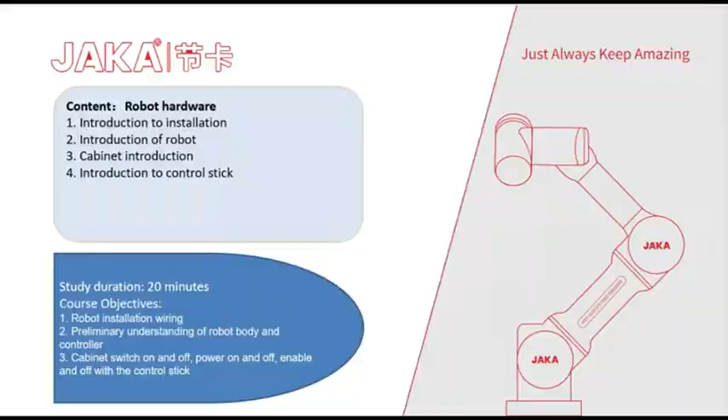Part 1: Introduction of installation. Let's take a look at the robot unpacking and installation video.

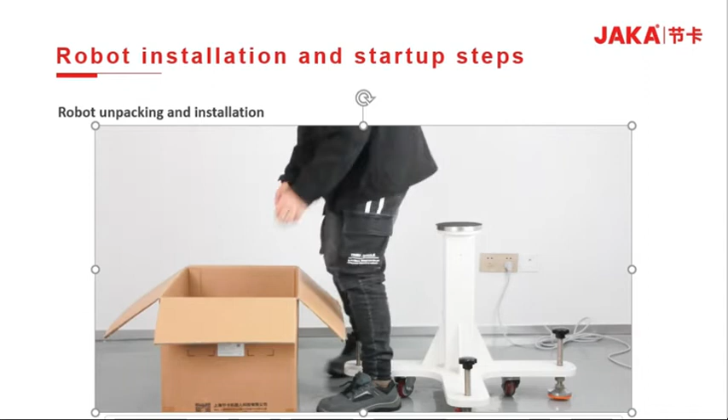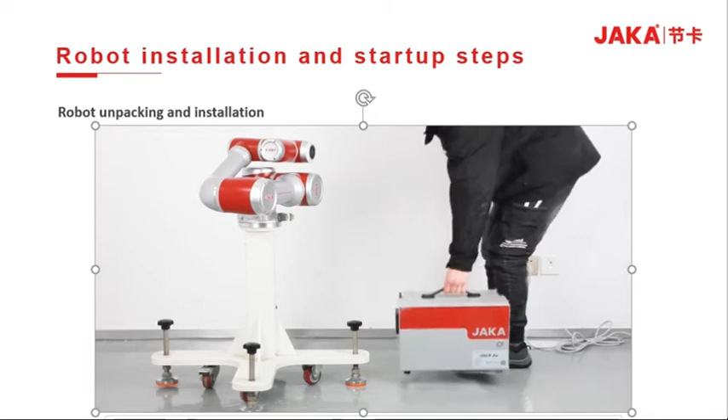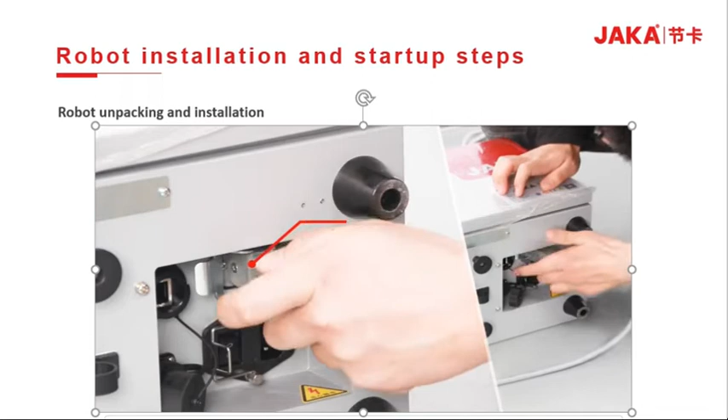First, take out the robot from the packing box and install it on a fixed base. Fix the control cabinet and connect the heavy cable of the robot with the hexagon screw in advance. Connect the robot control stick wire, then connect the external router.

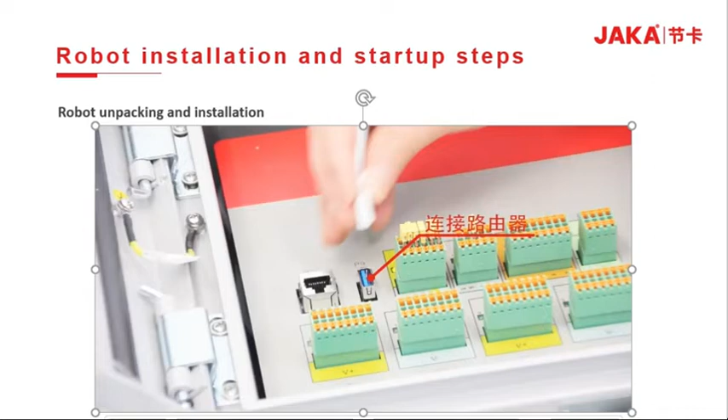Take down and route the network cable through the cable hole and connect it to the bottom network port.

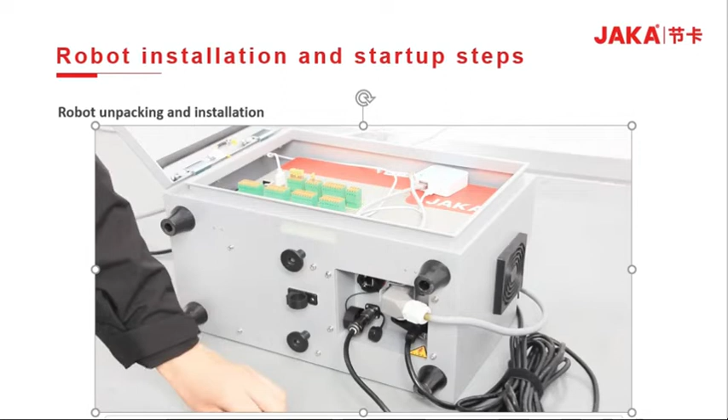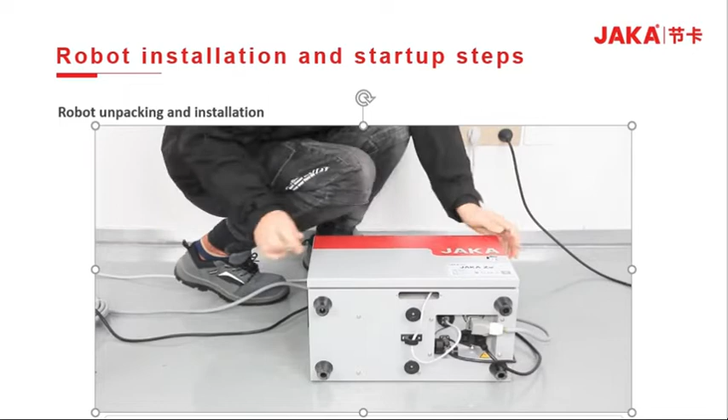Then you can connect the power supply, release the emergency stop button, and connect the pad to the wireless network.

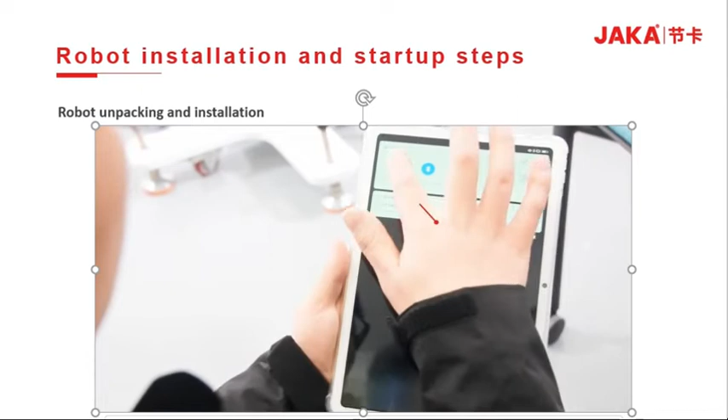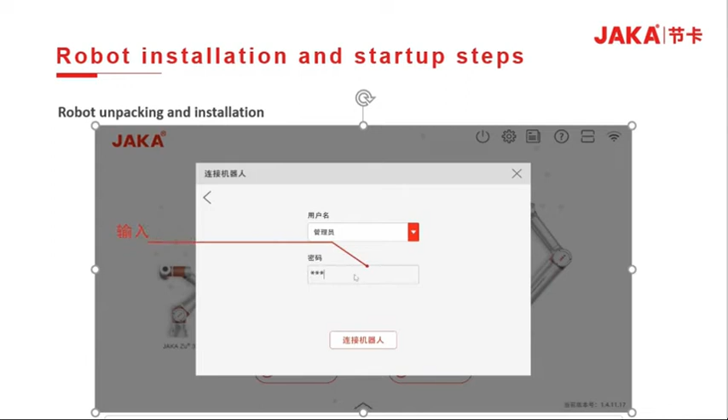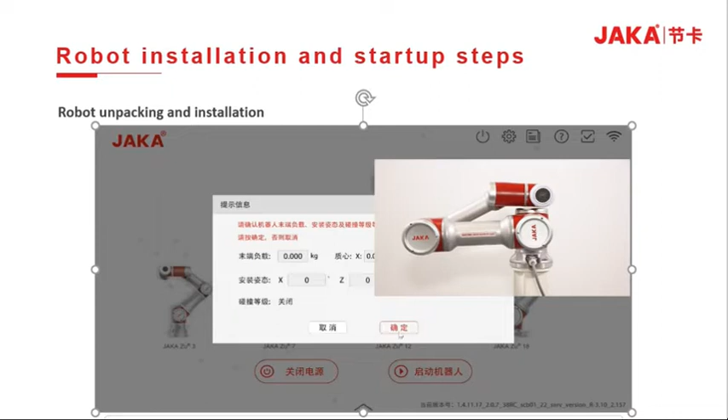Then open the software, click the connect button, select the robot, input the administrator password, JAKA admin. Then you can turn on the power and start the robot. The installation is complete.

The robot is fixed with 4 M6x25 inner hexagon screws. The 7, 12, and 18 models are fixed with 4 M8x25 inner hexagon screws. The Minicobo is secured with 4 M6x16 hexagon screws.

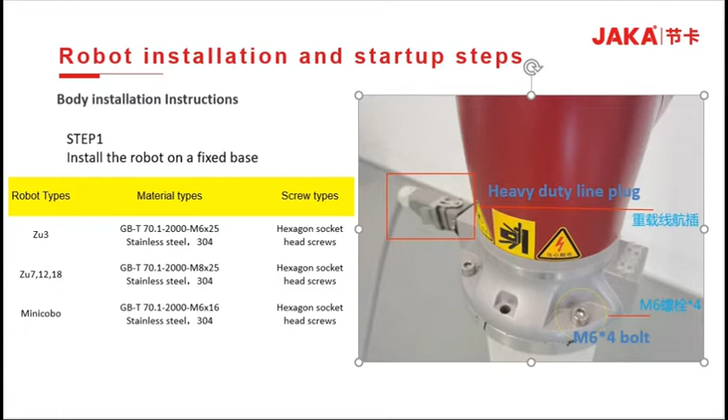On the right, we can see the bottom of the control cabinet. It is successively the Ethernet cable interface, body heavy-duty interface, handle line interface, and power switch 220 volt power interface.

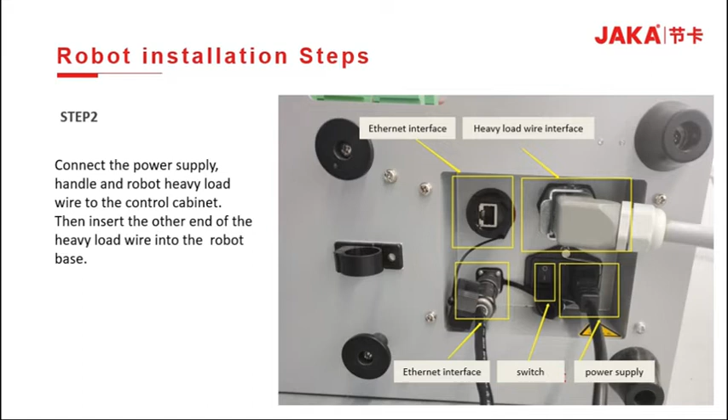Part 2: Introduction of the robot. The robot body is the moving component that achieves the desired action of the user. At the same time, the end of the body indicates the state of the robot, with the button for dragging and programming, the I/O interface, and the TIO interface connecting the end tools.

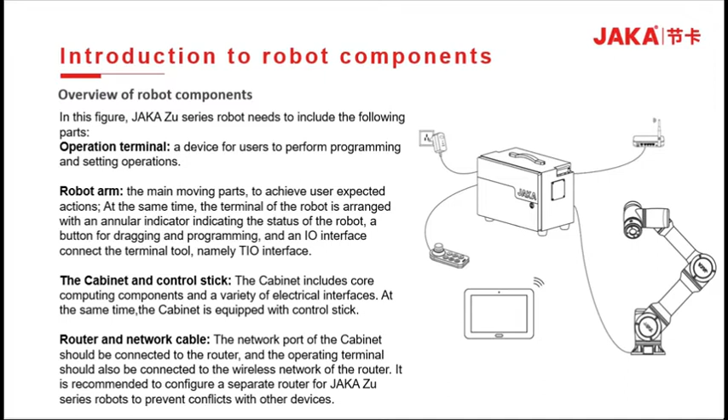The cabinet contains core computing components and a variety of electrical interfaces, and is equipped with a handle to facilitate user operation. The network port of the cabinet should be connected to the router, and the operating terminal should also be connected to the wireless network of the router. It is recommended to configure a separate router for the JAKA series robot to prevent conflicts with other devices.

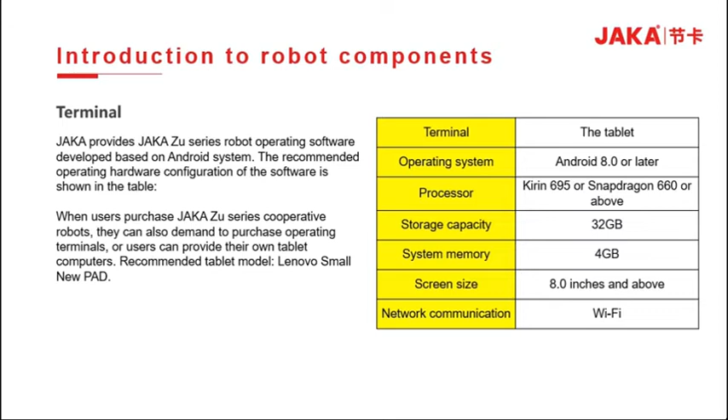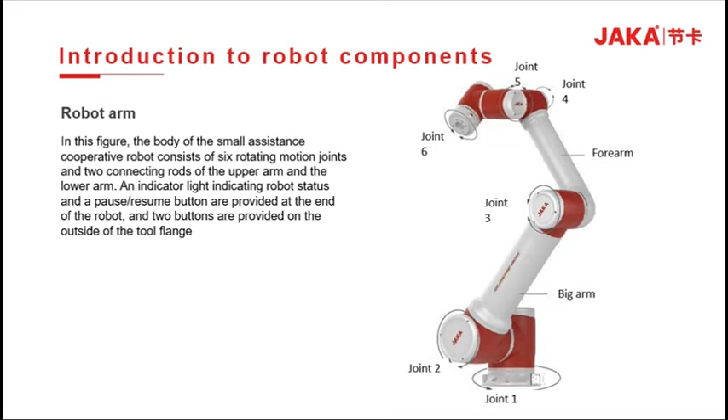The head of the robot is equipped with one button and a breathing light. The JAKA Zu has an indicator and a pause button. The breathing light's position with the button is shown in the figure, and its color meanings are shown in the table.

Blue is a powered-on state. Green represents enabled, so the robot is ready. Red represents fault. Yellow is free drive mode. Flashing yellow is pause mode.

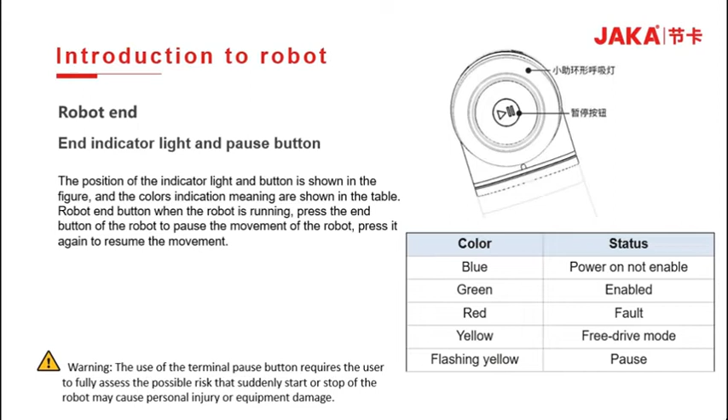The machine end button: press the end button when the robot is running, and it can suspend the robot movement. Press it again to resume motion. The use of the end pause button requires the user to fully assess the possible risks, as sudden start and stop of the robot may cause personal injury or equipment damage.

The mechanical end flange is equipped with the tool I/O interface and two buttons on the outside of the flange: a free drive button and a position recording button, as shown in the figure. When the free drive button is pressed, the drag instruction mode is entered.

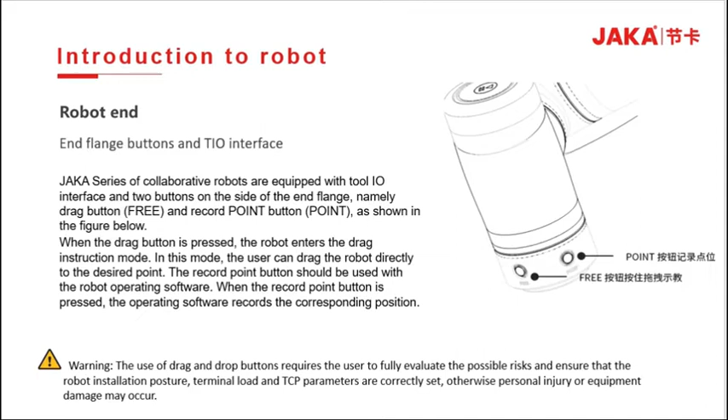After the user directly drags the robot to the desired position, press the point button to record the point position. The operating software records the corresponding position and creates a teach point directly into the programming page.

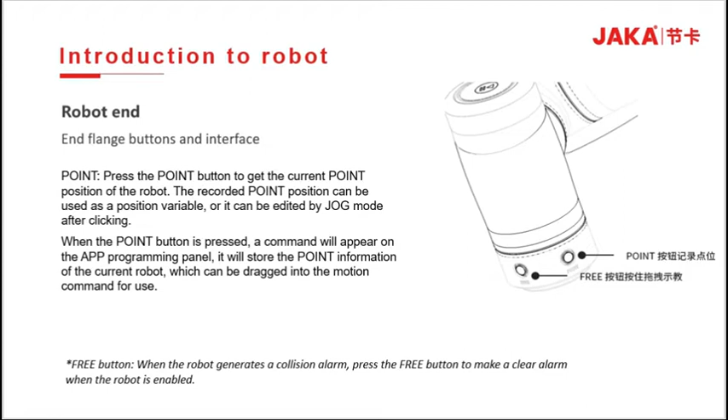The end of the robot has a TIO interface, which can interact with external devices for signal connection. The TIO external interface of the tool side is defined as shown in the right table.

Pin 1 is 24 volt plus, and pins 2 and 3 are digital input NPN type. Pins 4 and 5 are digital output NPN type. Pins 6 and 7 are the positive and negative terminals of the analog quantity. Finally, pin 8 is the 24 volt power supply negative.

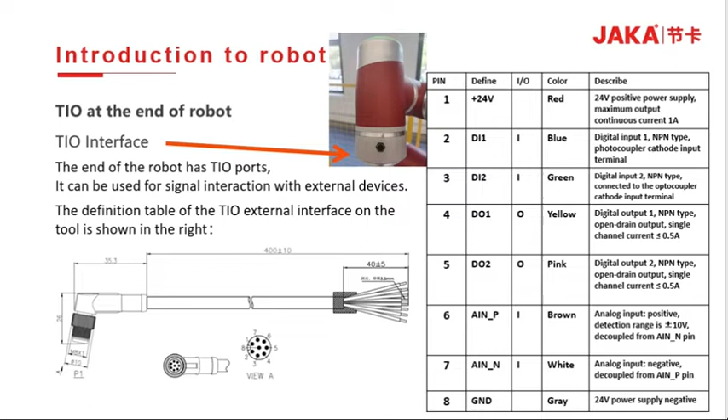Part 3, cabinet introduction.

Cabinet 2.1 internal ports: the cabinet has 8 types of external ports. P1 and P3 are digital ports, high level effective. P2 and P4 are digital quantity output ports. P5 has 2 configurable analog ports and P6 is a high-speed input. P7 is remote switch and RS485 communication interface. P8 is a safety function, namely internal 24 volt power interface. P9 is USB interface and P10 is Ethernet interface.

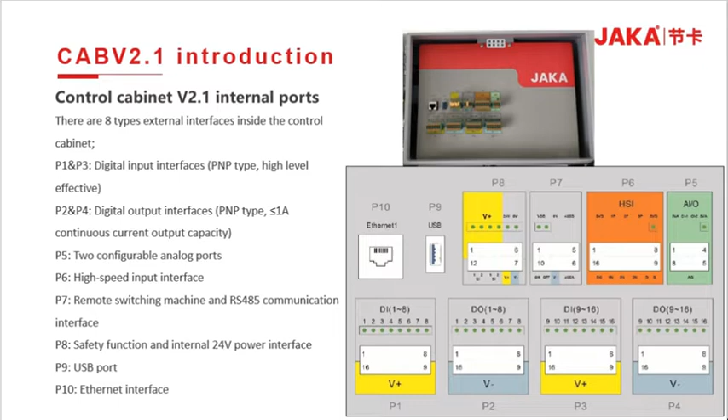P1, P3 are digital input interfaces, used to connect various sensors, switch buttons, etc. P2, P4 are digital output interfaces, used for digital signal output or to control solenoid valves, indicator lights, for example. P5, the 2 configurable analog interfaces, are used to collect analog signals or control devices.

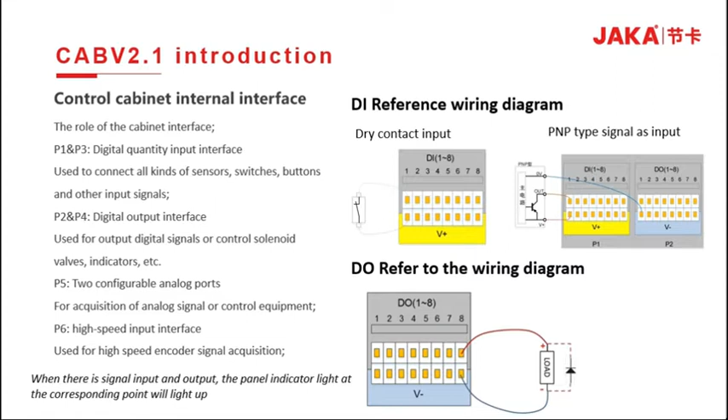P6 is a high-speed input interface for collecting high-speed encoder signals. P7 terminal remotely switches the machine on and off, and RS485 is used for Modbus RTU communication. P8 is the safety function and internal 24 volt power interface for front safety signal configuration. P9 is a 3.0 USB port for connection to USB flash drives and other storage devices. P10 is the Ethernet interface used to connect a router or open network communication.

Minicab monitoring introduction.

The Minicab typically uses a Minicab controller, external DC power controller, handle, and operation terminal. Note that the Minicab needs to be installed in a well-ventilated, dry place and cooled by natural convection. When the heat generated in the use scenario is high, if the cobot body runs at fast speed with a large load or frequent braking, external fans are required to cool the Minicab.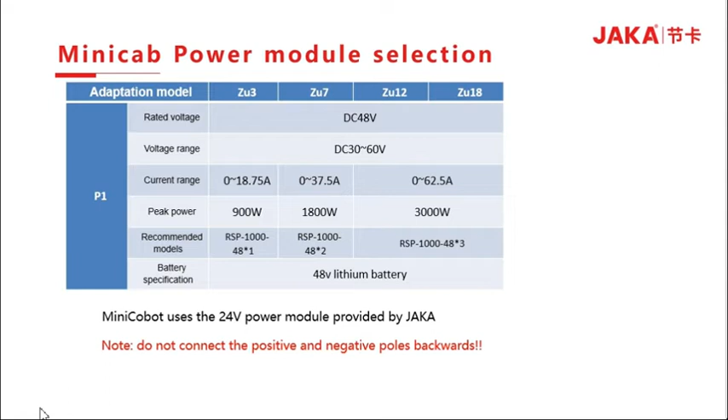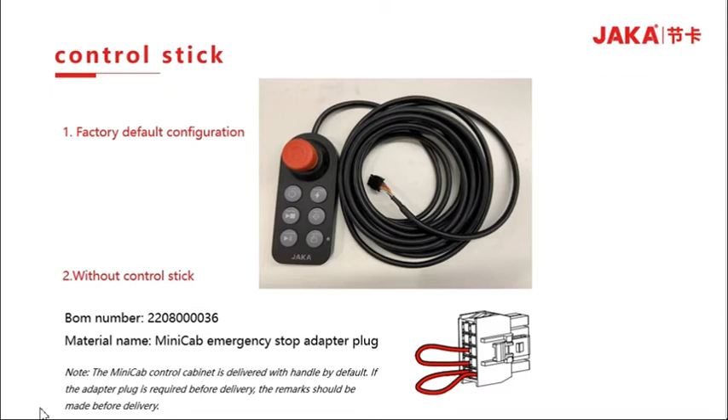Emergency stop: you can use the stop button on the controller handle. It can be connected to the external stop panel, supporting a separate emergency stop connector which is short-circuited to the internal 24 volt supply.

On the first panel, press the power button for 1 second and then release to start the electric control cabinet. The display will alternate red, blue and green. After starting, the cabinet will turn blue; to shut down, the same process applies.

Second way: through the handle to start and shut down, short press the start button for 1 second and then release. The buzzer rings, and the electric control cabinet starts or shuts down. Long press the start button for more than 3 seconds, the handle buzzes 6 to 7 times, and the electric control is shut down.

The third way is through I/O remote switch machine. Remote boot requires the user to provide an external 24 volt DC power supply separately. Connect the positive pole of the power supply to the remote boot interface of pin 8, and the negative pole to the pin 6 grounding interface. Press the switch for about 1 second and release to start or shut down the electric control.

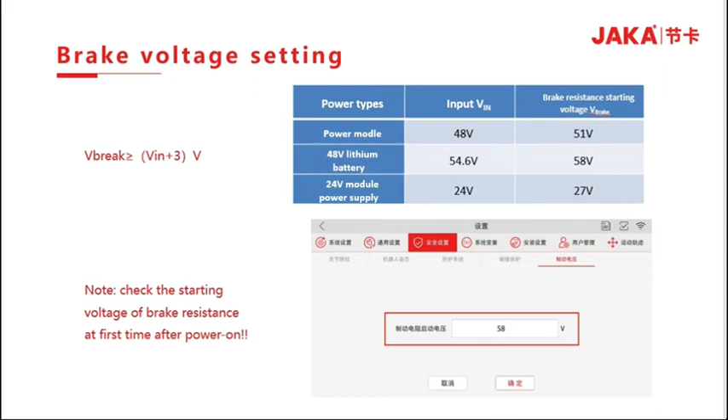Minicab's built-in Wi-Fi hotspot is password-free by default. Users can connect to the Minicab through a wireless terminal. After Minicab is started, the Wi-Fi indicator on the right side of the panel lights up. When the Wi-Fi is connected, the Wi-Fi indicator turns to blink. The Minicab and the robot body can be controlled through the app.

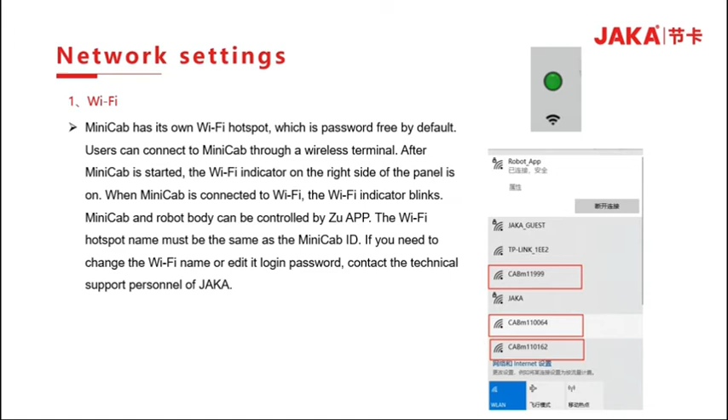The Wi-Fi hotspot name must be the same as the Minicab ID. If you need to change the Wi-Fi name or edit the login password, please contact JAKA technical support personnel.

The network can support 1000 MB, 100 MB adaptive network port, and the factory default configuration is the 10.5.5 network segment. When connecting to network port LAN 1, set the device IP address to a range from

10.5.5.1 to 10.5.5.255, or configure the device to dynamically obtain an IP address. If the device does not support IP address change, you are advised to connect the device to network port LAN 2

and set the IP address of network port LAN 2 to the same network segment as the device. If network port LAN 1 can be occupied and you have to use it, please contact JAKA technical support personnel to modify network port 1.

Do not set the IP address of network port LAN 2 to the same as that of network port LAN 1, otherwise login may fail. If the LAN port must be set to network segment 10.5.5, contact JAKA technical support personnel to modify the LAN port.

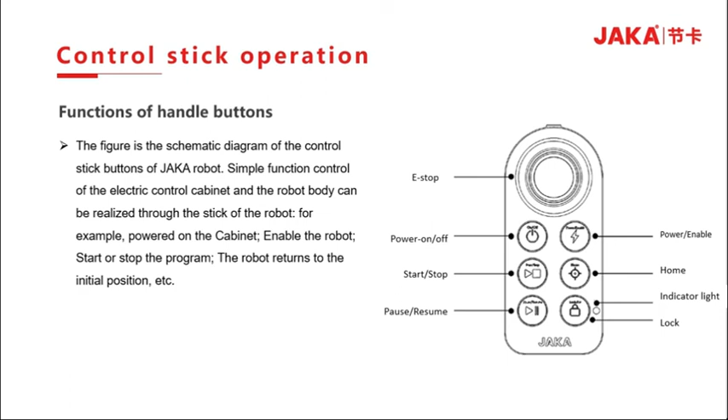When the power supply is not turned on, press the button to power on the cabinet. When the power is turned on, press the button to power on the robot. To enable the robot, press the lock button and enable button simultaneously.

When the robot is enabled, press the lock button and enable button to disable the robot. Short press the start-stop button to start the default program. Press continuously to control the robot movement to set the initial position in the non-running state of the program.

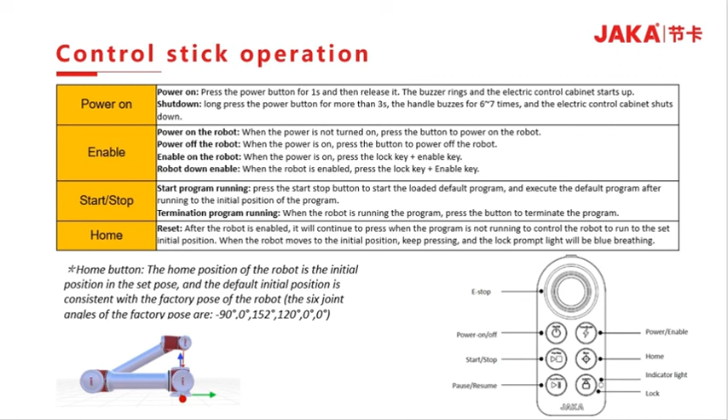When the robot is in the initial position, keep pressing the lock button and wait for the breathing blue light. Use the pause/resume button during the automatic operation of the robot.

Press the pause button to restore the robot to the suspended state. You can press it again to resume program execution.

Lock the handle by long pressing the lock button for 3 seconds, and the indicator will show an orange breathing light. Then the buttons are invalid except for the lock and switch buttons.

The app can control the robot, and the light will be off when the robot is in an unlocked state. The gray app interface can be used to control the robot. Note that the emergency stop button can only be used in emergency situations, not as a general control equipment.